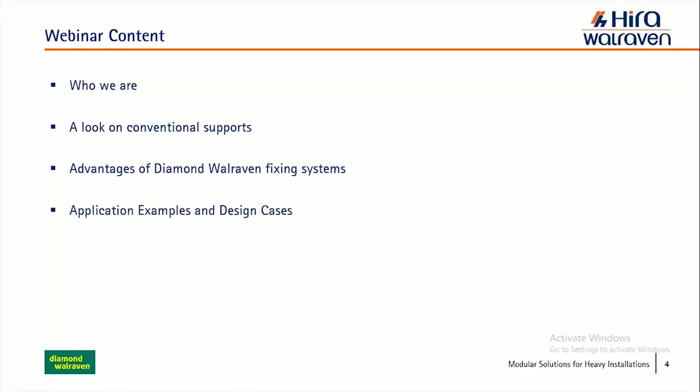So the content for today: I'll talk about who we are as the company, Hira Walraven. We'll have a look at conventional supports used to install MEP systems, the advantages of using our Diamond Walraven fixing systems, and some application examples and design cases of projects we've done before, and what kind of solutions we offer and what kind of problems we've solved.

To start with who we are, I'd like to first show you a quick video about our Hira Walraven Academy that we just launched earlier this year. This is a concept for us to share the knowledge we've created or learned over the past 40 years. We want to spread it out to the industry and help more people learn about this kind of system and installation. It includes webinars like this one, training and coaching sessions, and all kinds of engineering and support services. I'll just play it for you.

Right, so that was the video. I'll give a little bit more detail about us, about what we've done, and where we are located.

So we are a joint venture company between the UAE-based Hira Industries and the Walraven Group, based in the Netherlands. This joint venture was launched in 2015. Hira was founded in 1980 and currently has sales companies and manufacturing units in multiple locations across India, the Middle East, Africa, Asia, and the USA. Currently, we employ more than 1,100 people from more than 20 nationalities.

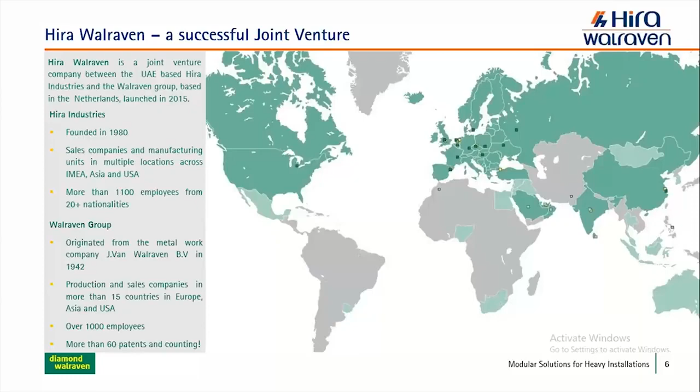Walraven itself originated from the metalwork company J. van Walraven B.V. in 1942, so it has several decades of experience. It currently has production and sales companies in more than 15 countries across Europe, Asia, and the USA, with more than 1,000 employees working for the group, and we hold more than 60 patents - something very exciting and innovative. This is something that guides us as a company.

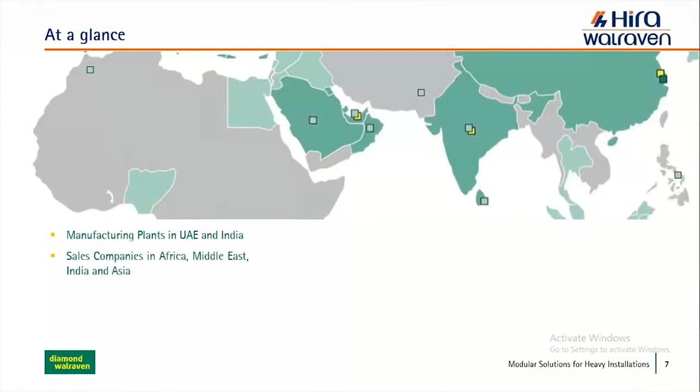At a glance, Hira Walraven has manufacturing plants in the UAE and India, and sales companies, as I said, across Africa, the Middle East, India, and Asia. We are a manufacturer and supplier of complete fixing system solutions, from pipe supports to vibration control. We are the only one in the Middle East that offers everything for this kind of industry.

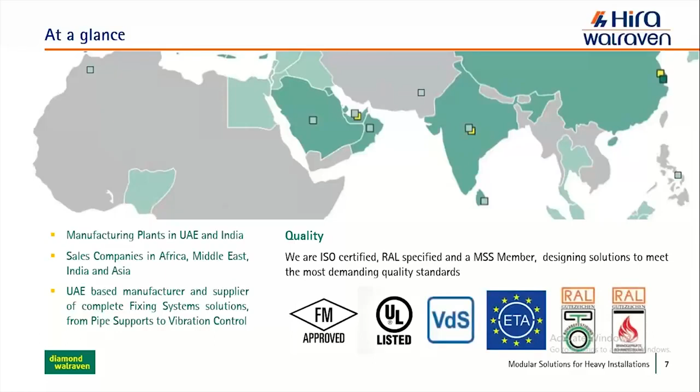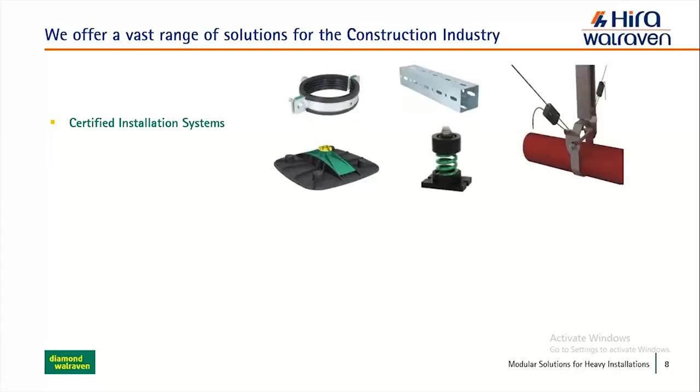Quality is very important for us, so we are ISO certified, RAL specified, and an MSS member. We design solutions to meet the most demanding quality standards such as FM, UL, VDS, ETA, and RAL for pipe supports. We offer a vast range of solutions for the construction industry that can be placed into different groups. One of them is certified installation systems comprised of pipe supports, channel systems, rooftop support, vibration isolators, seismic design, seismic restraints, sliding devices, and fixed points.

Then there are mechanical and chemical anchors with high performance testing, from concrete screws to through bolts, to high load anchors, to drop-in anchors, and chemical anchors, which are among the best performing types of products in the market.

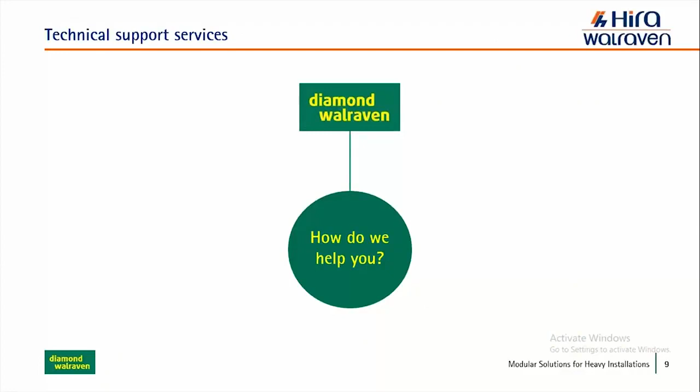We, as a company, how do we help you? We market our products under the name Diamond Walraven. This is our brand, company Hira Walraven, brand Diamond Walraven, and we offer anchor design services.

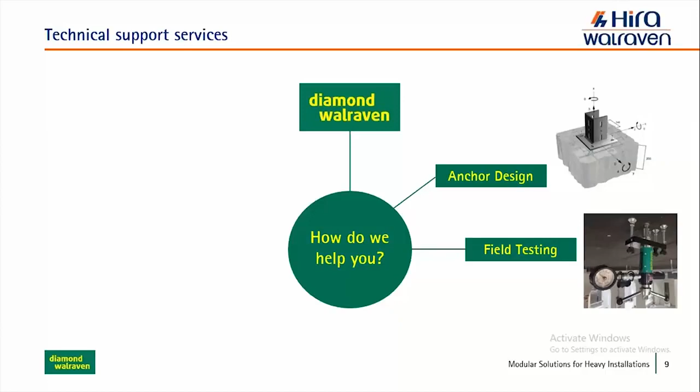We do field testing, pull-out testing on these anchors to verify the feasibility of the anchor itself and the base material, if necessary, to verify that the solution is valid. We do tailored and custom solutions for any kind of project, any kind of fixing system, and specifically seismic design for piping, ducting, heavy equipment, everything that needs to be supported from an MEP way, we do that.

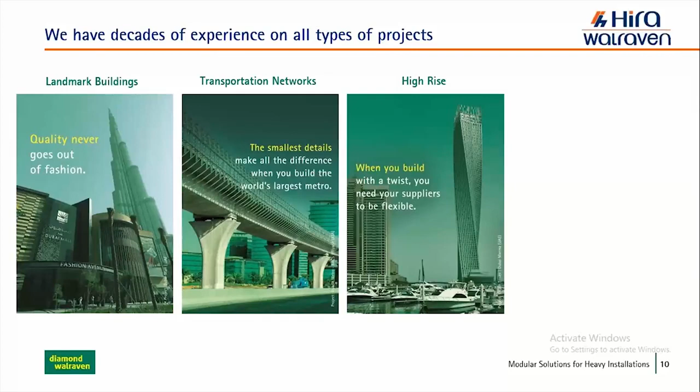We have decades of experience in all types of projects. For instance, projects like Dubai Mall, landmark buildings, transportation networks such as Dubai Metro or Riyadh Metro, or different kinds of transportation networks as well. High-rise buildings, so very high towers, we have worked on them, which we know have certain specifications. And iconic developments such as Expo, which we hope to see coming up to live next year.

So our values as a company guide us because we want to be the most preferred brand in this segment. We'll only get there by being the most innovative company in the industry. We want to set the standards, and we want to pioneer new and smart products and techniques.

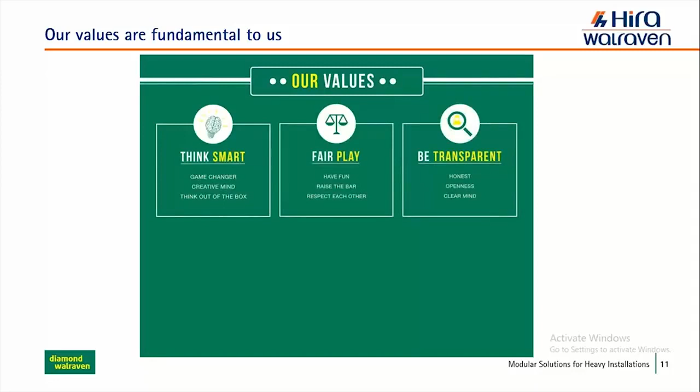A large part of this derives from our values, which we value a lot, and that includes thinking smart, fair play, being transparent, very open, very honest, communicating clearly, having open communication between ourselves and between our clients and our partners in the industry. We need to be reliable as well. We need to be trustworthy. And we always want to challenge ourselves and, by default, our clients and our partners as well. So this is what guides us as a company.

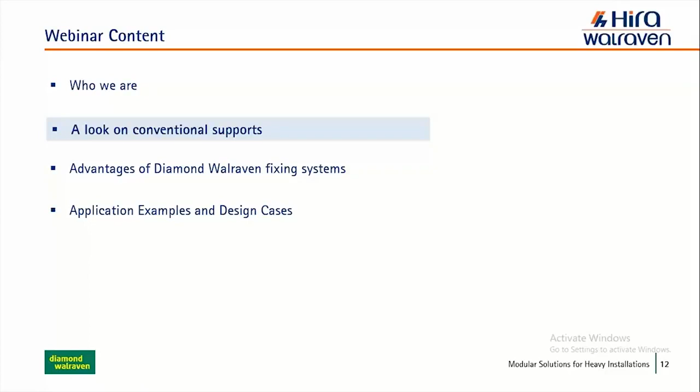Okay, so that was the introduction. Now I'll start talking a little bit more about what brought us here today. So I will start with a look at conventional supports.

Before I start, just allow me this introduction. The first MEP systems, let's say, were built to transport water from our ancient societies. People were very smart, very ingenious, and they always wanted to find ways to transport water wherever they lived. I'm talking about living in the desert or living in the mountains. There was something that always propelled people to find ways to inhabit any region, and one of the most important things was to have a good source of water.

So the Roman Empire, for instance, just built aqueducts of masonry. Here in this region, the UAE, we have very old irrigation systems used for agricultural processes and for that kind of use. And of course, we have evolved, and now our solutions involve pipelines, pumping stations that carry the water from spring to the cities.

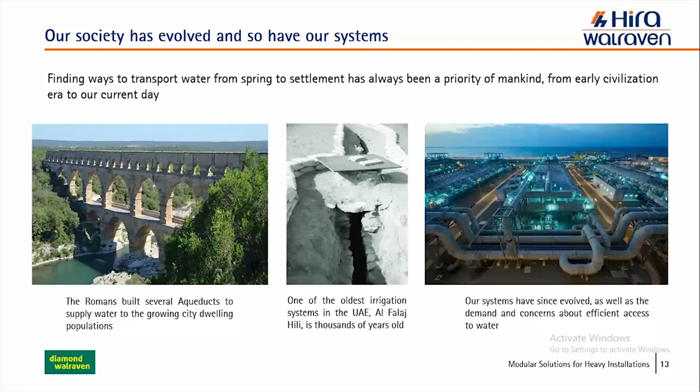So if our systems have evolved, that means that nowadays they require a network of supporting systems, and each discipline and project element has different demands. Of course, architecture and interior design want something that can be useful as well as pleasant aesthetically, like exposed installation. They need to be nice to look at, while they need to be functional. The integration of the various systems needs to be taken into account, and the effective use of available space is something of high concern as well.

For our segment, let's say civil, mechanical, electrical, what we need is systems that are very corrosion resistant, that are safe to carry the various components of electrical, plumbing, HVAC, or firefighting, and they need to be easy to integrate between all of these services.

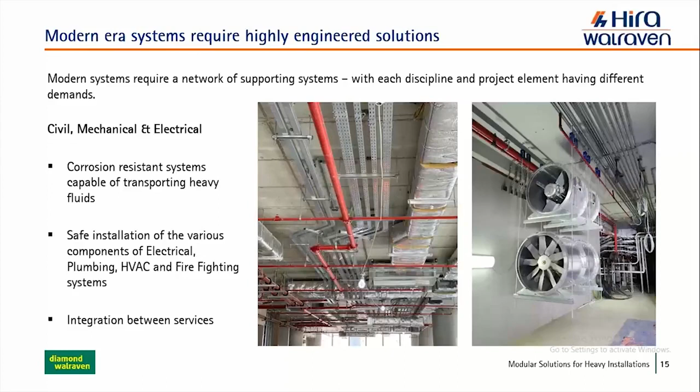And the reduction of non-structural cost greatly impacts the total amount. Why? Because the value of the non-structural elements far outweighs the structural cost. It's crucial to be efficient on all aspects of the construction.

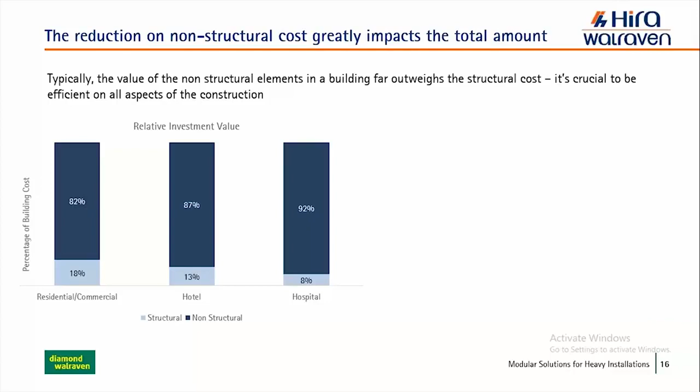I'll show you a couple of things. This one is the relative investment value of a building. The structural part for, let's say, residential commercial is 18 to 20%. So that means only a fifth of your money's worth is going to the structural part. Everything that's non-structural, I'm talking about MEP systems, furniture, architectural elements, facades, all of this is part of the non-structural part. So this is something so valuable that we need to be very efficient on installing and on designing these kinds of systems.

As you see, there are way more non-structural elements in a typical construction than structural. Structural, I would say, is beams, floors, roofs. This composes the skeleton of a building, but a building is only a building when it has furnishing, equipment, partitions, piping, windows, all of this.

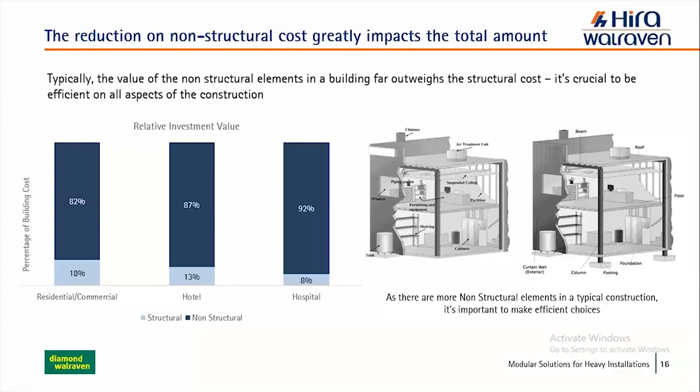If you are more efficient, if it costs less, if it's faster to do, that means you can move on to the next job. You can finish the current job much faster, hand it out to the client, and get a better return on your time and investment.

Typically, when you talk about MEP installations, you talk about heavy, or medium and light duty. What people have been using for the past decades are mostly I-beams, L-angles, C-channels. This is what I call a traditional supporting system.

Beams, of course, can be used to support piping. Is it a good solution? As you see in the images, to connect all these elements—pipe work and every kind of system—to these supporting structures, you need a lot of work. You need to weld, clean, lift them, which is not easy. It costs a lot of resources. As a general rule, these kinds of systems usually take 4 times longer to install than what we propose as a better solution.

And generally, they take more resources. And it is clear why.

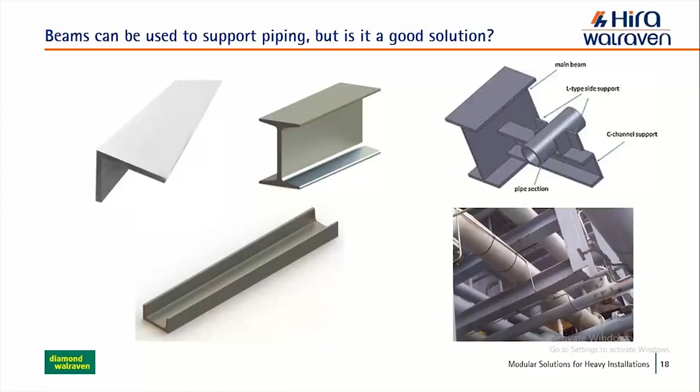Conventional systems are much more labor intensive because you need to cut beams at site, with heavy tools or torches. Then you need to remove the slag, grind, and perform a lot more finishing work and steps. If you want to weld, which is often the case to connect different elements, there needs to be surface preparation, and it takes time, done a little bit outside of where you actually want to install.

Welding takes time and requires special licenses, and you need to be concerned about safety. You need to grind after welding, and repaint or galvanize. And of course, this is heavy and requires more resources to fix in place. You need more people to carry or lift them into place, or heavy machinery to support you on this task.

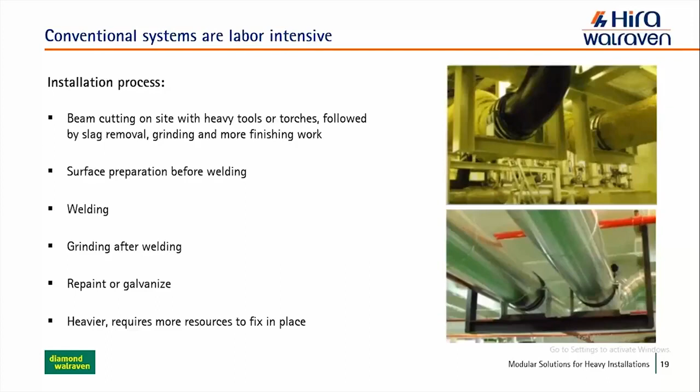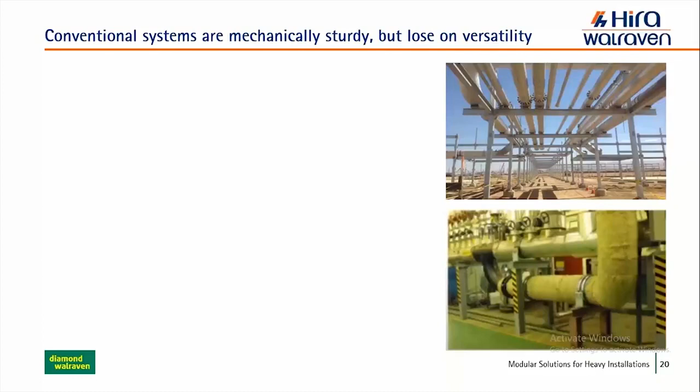So it's not easy to do all of this, yet you still see a lot of projects where this solution is still proposed. We believe at Walraven this is not the best or ideal way to do this. Now, of course, these systems do have advantages, the main one being that they are very sturdy—mechanically amazing, able to carry heavy loads—but it costs a lot, and there are a lot of drawbacks to consider.

You lose a lot of time on the job. You need specific health, safety, environment, and technical certifications just to perform the welding. Plus, of course, you need to undergo inspections on the quality of the welding, which also takes time. There's a greater fire hazard, since we're talking about hot work.

And you have a lack of flexibility for future expansions or modifications. So if you want to change the type of pipe, the piping direction, or even the diameter of the pipe, it will take a lot more of these steps to be performed again, or even doing it all again. Then there's high cost in man hours because of all of this—more energy, more material, more people working. And this is not an efficient way.

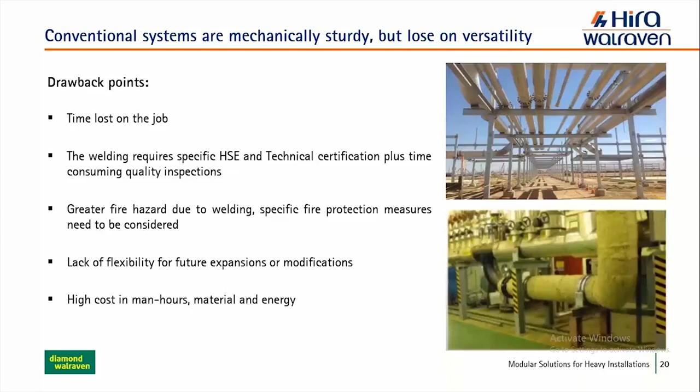This is what increases the cost of mechanical systems in a building. So to maximize your return on investment and cut project costs, the best solution is modular support systems.

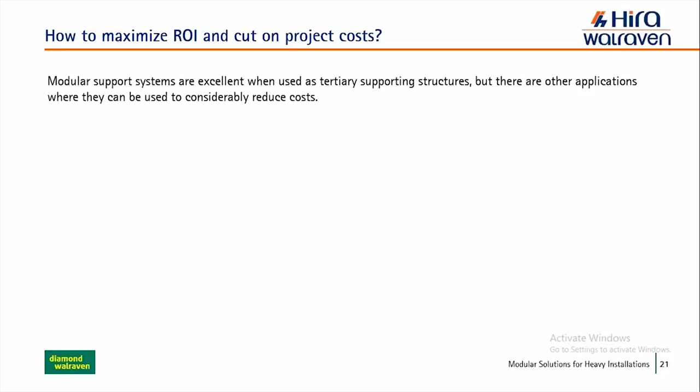They are very common as tertiary supporting structures, but this webinar is more geared to consider them as secondary steel structures, serving as a support connected to the main structure of the building, whether concrete or steel. Instead of using another typical beam or element, you can consider heavy modular solutions as secondary structures for your project.

Another advantage over traditional systems is prefabricated assembly. If you want to speed up your process on the factory floor instead of at site, we can design and fabricate these for your project based on your demands and requirements, and per your need for specific systems like duct sizes, pipe sizes, equipment, and fans. We can manufacture them and then ship them out to you, saving you a lot of time.

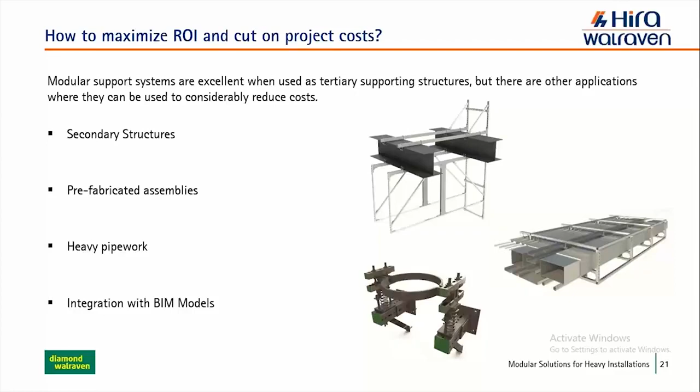For heavy pipe work and integration with BIM models, it's much easier to use our extensive BIM library, which has all the models for these products. This makes it much easier to integrate with your project BIM model, and can speed up your installation time approximately 4 times compared to traditional systems.

So our solution for all of these heavy applications is the Maxx heavy frame modular system.

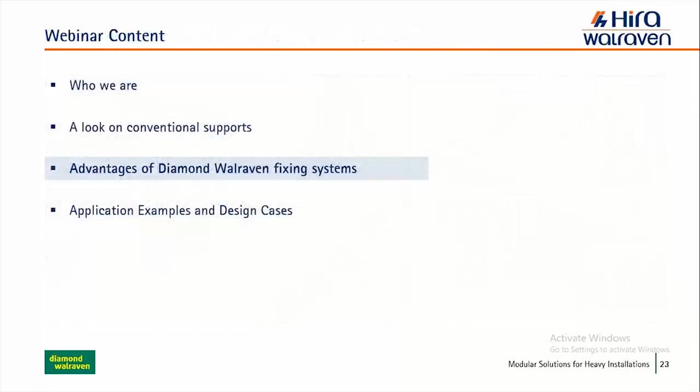Before I go to that, I'd like to speak a little more about our other solutions. We offer channels for light duty applications, light to medium duty applications, channels for medium to heavy duty applications, and our Maxx heavy rail for heavy duty and industrial applications.

Our rapid rail, which is our light duty segment, we offer in 27x18x1.2 size, and this is by standard in pre-galvanized or electro-galvanized finish, which can also be done in HDG in our Ultra Protect. In the previous webinar, if you attended, I spoke a little about our BUP system, and stainless steel if necessary.

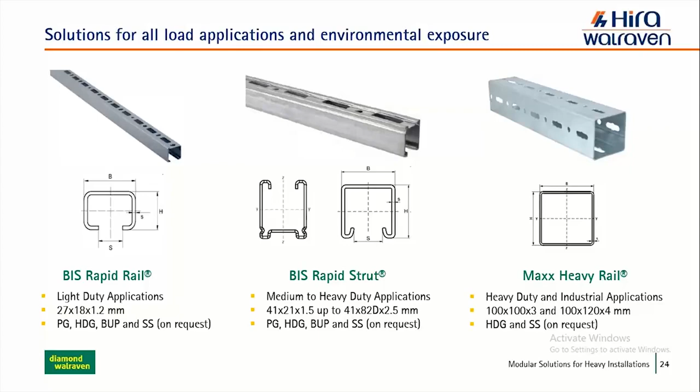Same goes for our rapid strut: electro-galvanized, hot dip galvanized, our Ultra Protect system, and stainless steel. Our Maxx is by default HDG, but if necessary we can go a little further up for the project.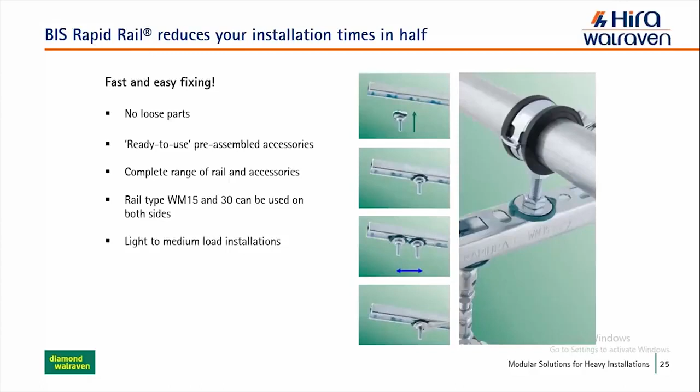Our rapid rail reduces installation time in half by using no loose parts. Everything is pre-assembled, including the accessories, and you just need to connect them to the channel itself, to a clamp, then to the pipe or whatever needs to be installed. There's a complete range of rails and accessories, and our rail types can be used on both sides, suitable for light to medium duty installations.

Typical installations would be sanitary, some light duty ducting, and light duty piping, which can be connected as single piping or multiple piping running side by side. It's very flexible and very common. Instead of just using a normal C channel or angle bar, consider this to speed up your time.

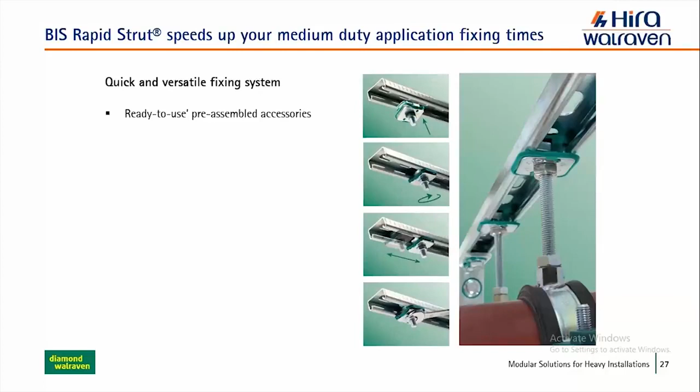For medium to heavy duty installations, we offer the rapid strut, a serrated channel with ready-to-use pre-assembled accessories suitable for all profiles. Our rail and cantilever arms have a serrated profile for extra grip. We offer them in sizes 41-21-1.5 all the way up to 41-82 double, from 1.5mm to 2.5mm thickness, depending on the type of requirement and load. We study it with you and help you choose the right solution.

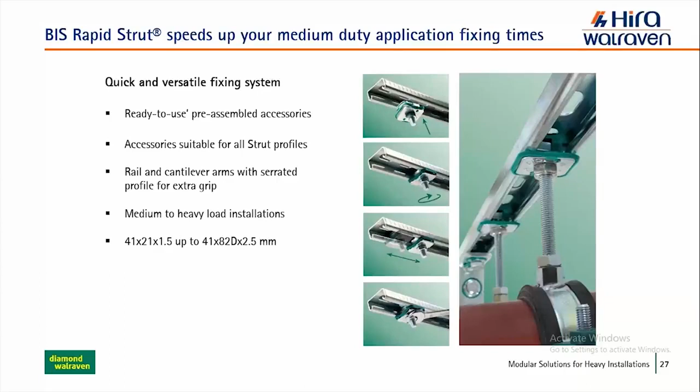But for heavy applications, there's something else. The rapid strut can be used to connect all types of pipes, ducts, and equipment, whether multiple pipes side by side or a single pipe, as shown in these images. It speeds up your time considerably. There's a huge impact on installation times compared to doing a single drop-in anchor with threaded rod and then pipe, which takes a lot of time. This can save you quite a lot of resources on your construction project.

So now moving on a little bit to the Maxx heavy rail profile. We offer them in 100 by 100 by 3 and 100 by 120 by 4, so you're talking about a square profile or a rectangular profile. This is what we offer for heavy applications.

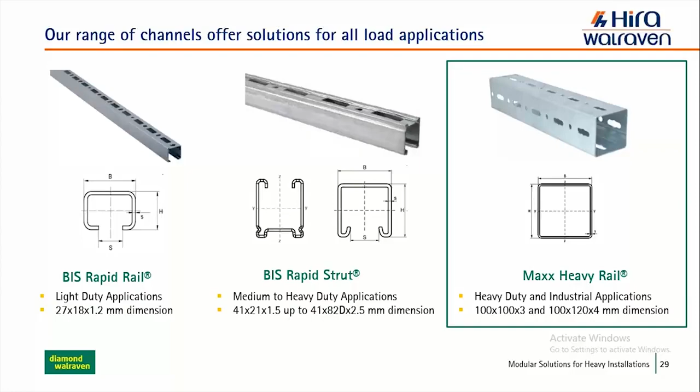I'm talking about heavy pipes, 20-inch for instance. Think something like this: heavy equipments, heavy chillers, something that needs to be installed and it's not easy to install, or it will require a lot of support. This is a solution that you can consider, or when it's something that by default needs to be installed and exposed under rough environment conditions. Since this comes by default with HDG finish, this is what we typically propose for this kind of applications.

So the Maxx heavy duty profile features a closed box profile that's highly resistant to torsion, has continuous perforation on all sides. The standard finish is HDG, with stainless steel available. There's a huge variety of connectors and accessories for easy frame building. And of course, as before, we have an extensive library of 3D models to be quickly integrated with the BIM model of the project.

So the section itself is quite light. You see, for instance, the 100 by 100, it just weighs about 8 kilos per unit weight. So this is lighter than a typical I-beam of the same kind of dimension. So it's much easier to install, plus has all of the advantages of not being needed to be welded to any other element. You just quickly connect everything in a modular way.

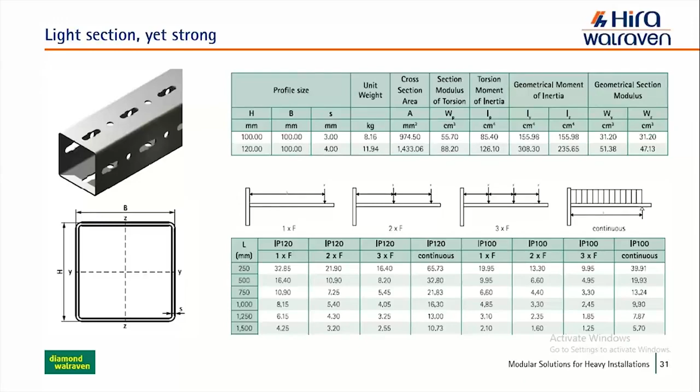Plus, being such a light section, it's still quite strong. You can see that it can carry all the way to 32 kN, for instance, as a cantilever form. So it's something that's very sturdy as well. So you don't have to worry about if it's going to hold the load that you need, or if it's going to support your equipment. We designed that in a way that it will be able to support, because we have a lot of confidence, and our results and our data and our tests show that this is something to be trusted.

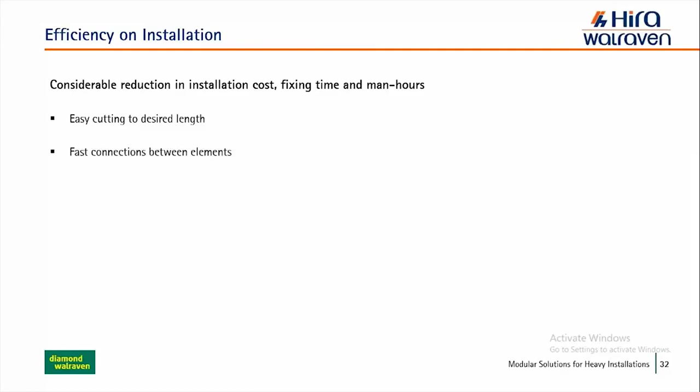So Maxx itself offers a considerable reduction in installation cost, in fixing times, and in man hours. It's easy to cut to the desired length. It is easy to connect between elements. It is very flexible for future expansions or modification of the system. If it needs to be, you can reuse it easily, because you just need to remove what was connected and then reconnect again.

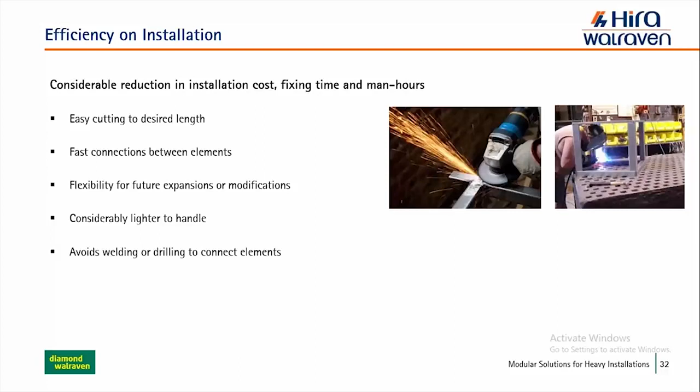It's considerably lighter to handle, and more importantly, it avoids any welding or drilling to connect elements. So the type of work at the factory floor or even at site is completely cut off. And there's no need for repainting or galvanization since the surface is already treated. So there's no need for galvanization, repainting, any grinding, deburring, or slag removal. So it will save a lot of time in these kind of installations.

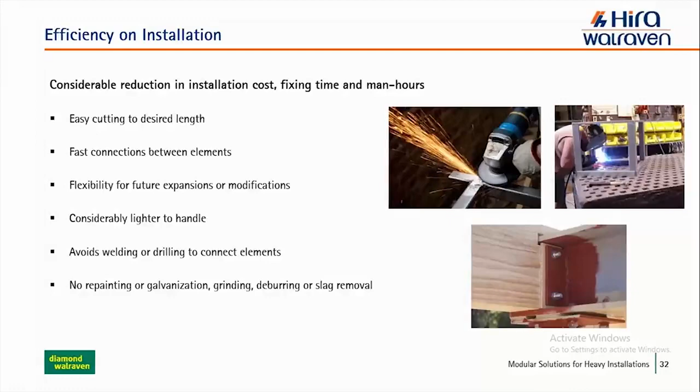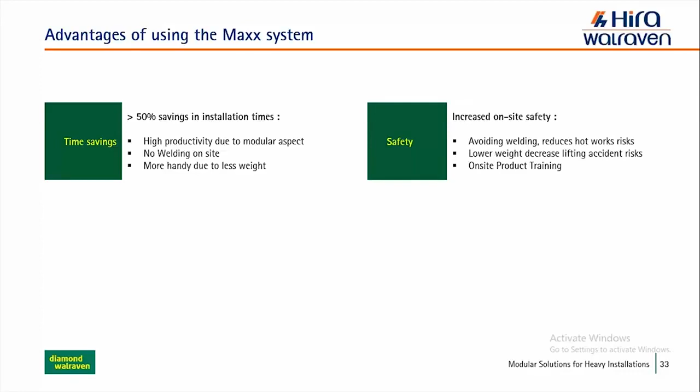So to sum up the advantages of using the Maxx system: it offers 50% savings in installation times, if not more, with high productivity on the site, no welding, and of course it's more handy. It's a lot more safe because since it's lighter, it's easier to carry. You avoid welding, so you reduce hot work risk.

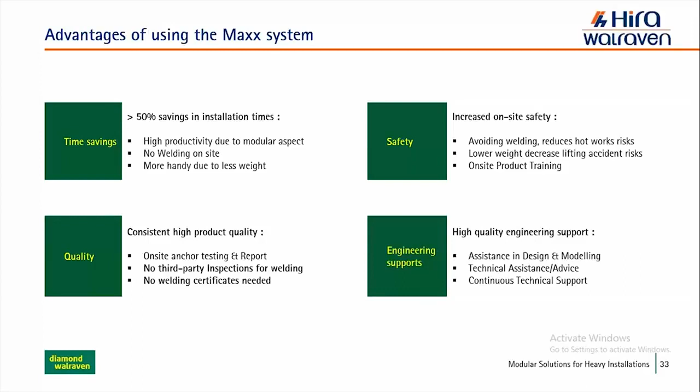And we can offer complete on-site product training and coaching as well. The quality is very consistent. There is no need for third-party inspections for welding. There are no welding certificates, and you will be completely safe using such a system. And of course, we provide high-quality engineering support. We assist in designing and modeling, we assist with any technical advice, and throughout the project we offer continuous technical support.

So before, I was talking a little bit about why this is something specifically used for outdoor installations, and this is because it features high corrosion resistant performance. Because by standard, since it comes with hot dip galvanization, it will last when exposed to rough outside conditions. It can last for a great number of years without any concern over life expectancy, or if it's going to rust, or if it's going to fail after some time when exposed to rain or in an industrial setting. This is something that's very resistant to that kind of conditions.

So hot dip galvanization is a process where we apply zinc to the steel by immersing it in a zinc bath.

By doing so, a thick zinc layer is applied to the entire product. You won't see less zinc in one part and more in another—this is very continuous and very uniform. The Maxx itself has a coating thickness of at least 75 microns.

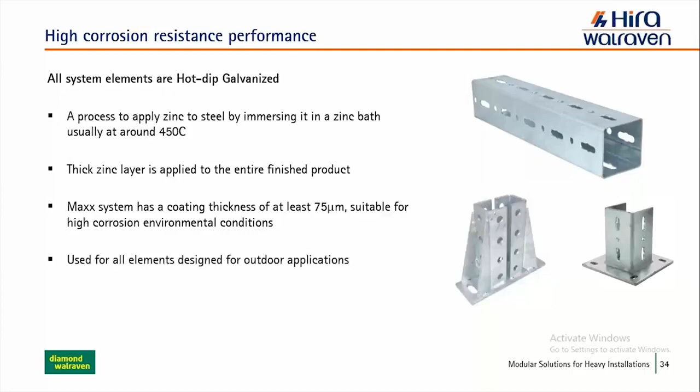So it's suitable for high corrosion environmental conditions, and when exposed to rough weather it will resist for a long period of time. This is used for all elements designed for outdoor applications. Typically, hot dip galvanized can be used in C3 to C4 corrosivity category levels—medium to high corrosion levels.

An idea of the typical environments this is used for: indoor spaces with high frequency of condensation and high pollution from production processes. Think about chemical industries—even outside, they are quite aggressive to support systems. By hot dipping, or by using our Maxx system, we can control the damage that corrosion causes.

In outdoor environments, you'd see urban and industrial atmospheres, or temperate zones with high pollution, and coastal areas without saltwater spray or full immersion, but with some exposure. This is where HDG can be used, and where we typically use this kind of system. Whenever something else is needed, we study it and offer alternatives, such as stainless steel.

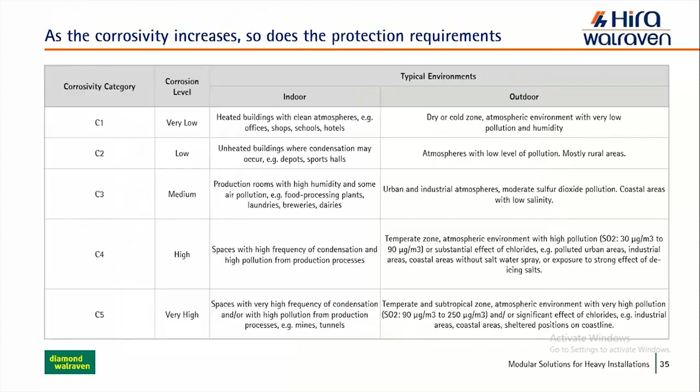Depending on the condition, if it progresses to something heavier or you expect something different, it needs to be studied and verified. But as a rule of thumb, this is something to consider. By using this kind of product, you'll be safe in any outdoor installation.

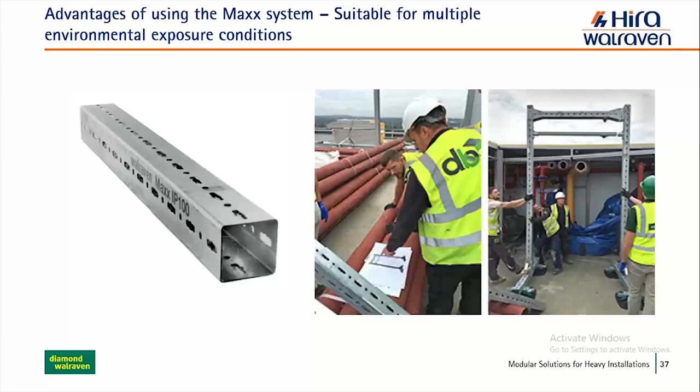In this kind of case, this is what we go with—we go with Maxx. We believe this is the best solution, and then we can couple it with the rest of the systems if necessary, and in this case it was necessary. So this is the kind of solution we can offer in your project. Of course, it's not only that.

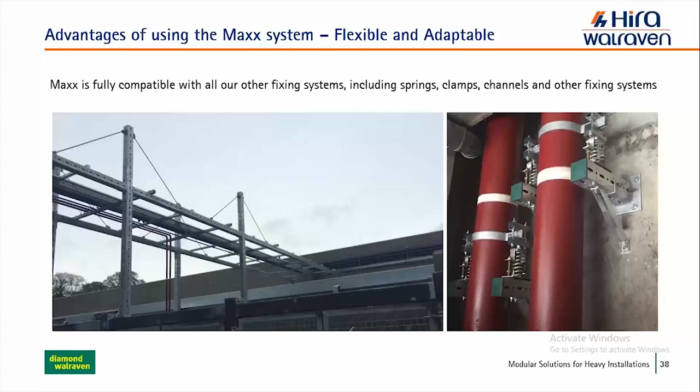Another example of heavy load supporting is chill water pipe risers for high-rise towers. At the fixed points and sliding points, this causes a lot of stress and huge reactions, and because of that, the traditional way to install this is not the best, since you cannot really control movement and the actual stresses on the structure. So we go with what we believe is the best solution, which is again using our Maxx system.

To connect elements in our Maxx system, we have what we call the Maxx hammer fix, which enables you to connect every element in just 3 steps. You just need to insert this special bolt between the main Maxx support and all the other elements going to be attached to it. You insert, turn a quarter of a stroke, and then attach with another nut. It's so easy. So if you're considering how to install something in the middle of a channel that you cannot reach inside, this is the solution.

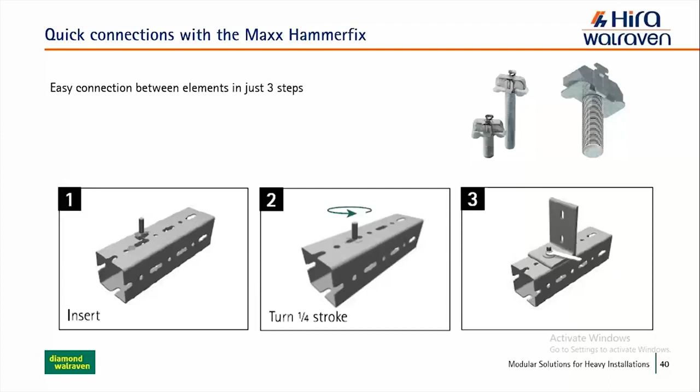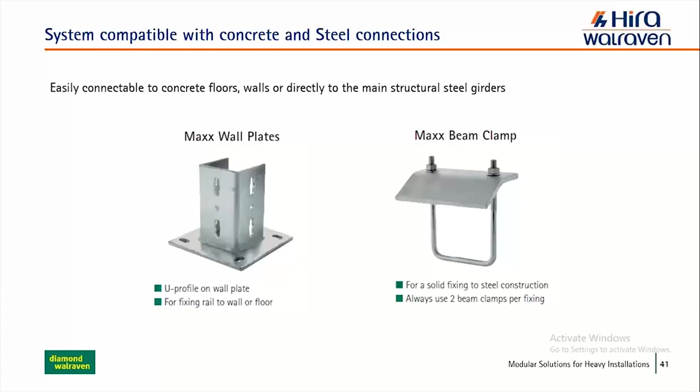Of course, the system is compatible with any concrete and steel connections. In concrete, we connect the system to wall plates. You connect the profile directly to the wall plate, and then use heavy load anchors, through bolt anchors, chemical anchors, any anchor needed depending on the actual application. Or if you're going to install on steel girders or steel beams, we offer beam clamps that can easily be used to attach the Maxx profile to the existing steel structure.

If you compare this with preparing in a traditional way with I-beams, it will take maybe 1 hour with all the welding necessary and all the carrying. It will take a lot of time. With this, you can do it in 10-20 minutes. It's so fast and so much easier that instead of building 1, you build 4. That's basically what we're talking about.

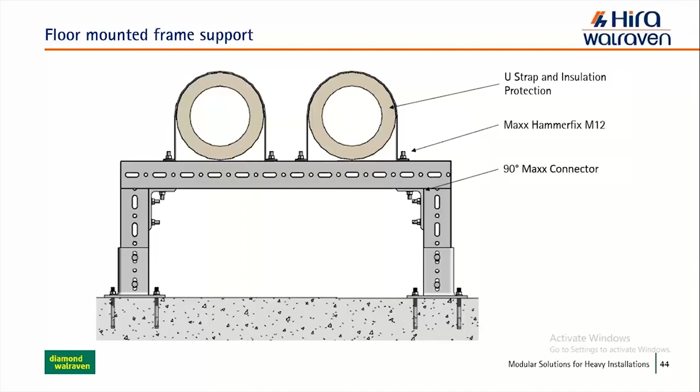For floor mounted, it's pretty much the same thing, just inverted instead of ceiling, but the elements are the same kind of thing. This is also very typical for heavy piping in machine rooms and plant rooms, using the Hammerfix, the connectors, and the wall plates.

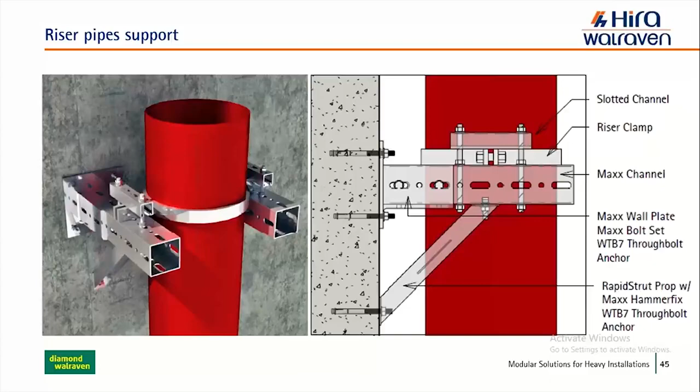For this kind of application, the safest way to go is always with something very sturdy, mechanically strong, such as our heavy-duty system. In this case, you would use our Maxx, then our wall plate, connected to the concrete wall with through bolts, so with our ETA-approved anchors or any chemical anchor suitable for the application, depending on the actual reaction values. By designing this, we guarantee a long-lasting service life and a safe connection to the riser pipe.

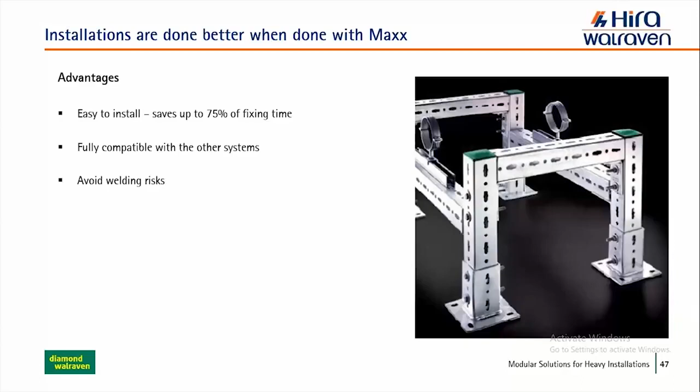To sum it up, installations are done better with Maxx because it's very easy to install and saves a lot of fixing time. It's fully compatible with other systems and avoids welding risks. This is typically used for high elevation installations, or when there's a considerable span between supports, for industrial and highly corrosive environments, and for heavy load equipment and pipes. These are the three main factors: when we need to bridge a large span, when the environment is very corrosive, and when there's heavy load equipment to be supported.

So how do we do it? We propose the solution and verify it using finite element method software. We don't just do it by hand, so we do it in a proper way. We study and check the system feasibility, test the section stresses, check the moments, the reactions, and the displacements. We also verify the connection between frame elements, which is very important—this is often the weakest link. A proper verification of the connection between elements is where one needs to be completely sure, especially for very large spans, or when connecting channels between one another to bridge a large span.

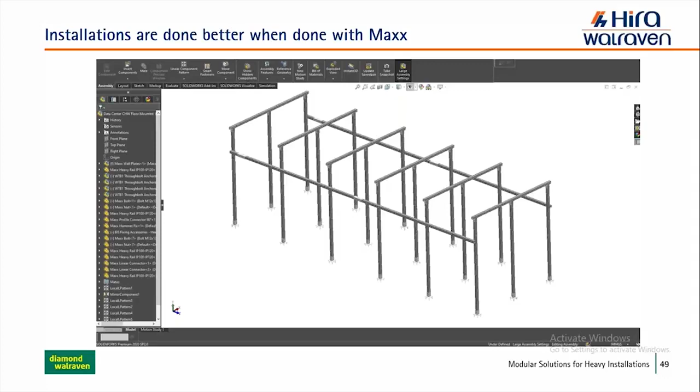This is our process for these kinds of designs. After we study and reach a safe solution, we model everything in 3D, then convert it to something that can be integrated with the BIM model. We give you all of this, including the assembly parts, exact material quantity, lengths, and all associated documentation, which will make your installation quicker. Even on the installation side, we'll coach the teams doing the install, inspect that everything is done properly, and try to help you throughout.

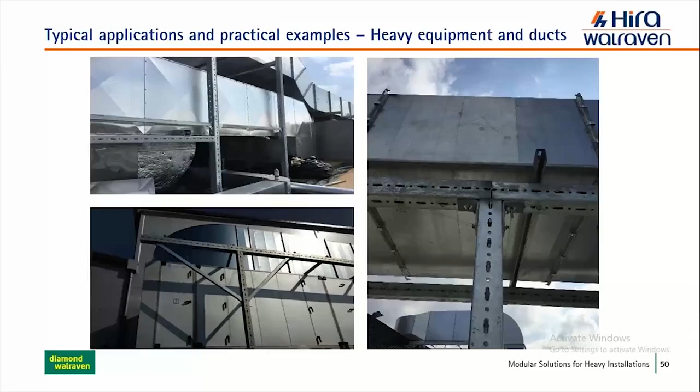Some application examples of what we've done in the past and present: heavy equipment and ducts on outdoor installations in industrial settings, supporting large spans and huge lengths of ducts. This is where we would consider using our Maxx system, as shown here in the pictures.

Another example is supporting heavy industrial equipment. In this picture, the concern was that this machine needed to be elevated about 6 meters high, with a lot of clearance underneath for the operator to reach equipment placed beneath it. With a traditional system, this would take a lot of space, take a lot of time to manufacture, and everything would need to be galvanized since it's installed inside an industrial plant. All these considerations led to using Maxx, which was very easy to design and install, while guaranteeing a high service life.

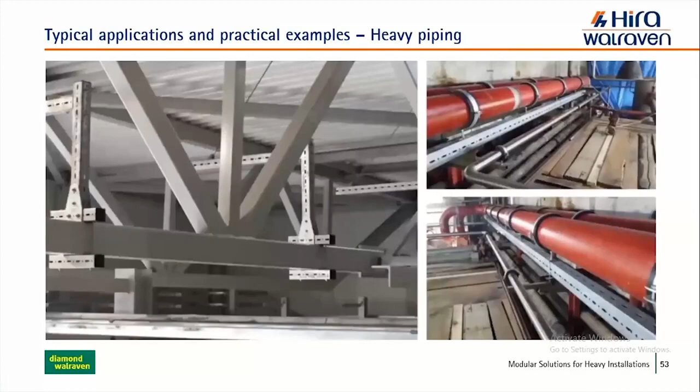To support heavy piping, straight from either concrete walls or steel structures, this is typically where you'd see the need for using a heavy modular system to support these kinds of loads.

Fixed points, as I mentioned before, are on the risers, but fixed points can also be on horizontal pipes. In this situation, this was a fixed point for a number of parallel pipes, and they are installed outside, so they're constantly exposed to rain and snow. They're exposed to heating and freezing cycles as well.

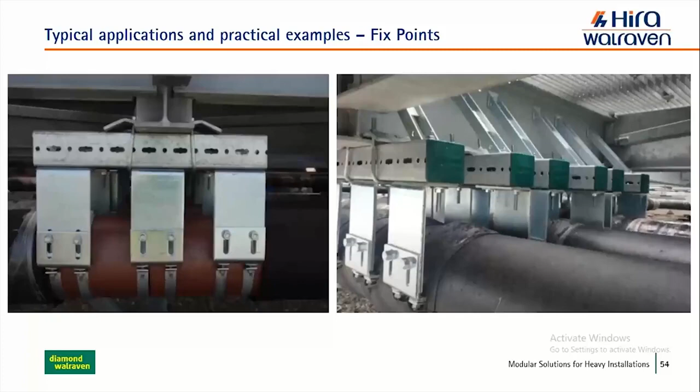So usually it taxes the system a lot on the corrosion level. In this situation, we use a mix of our Maxx and BIS systems, our fixed consoles, to support this. This is an example of how the system can be connected between all of the elements and all the different systems that we propose. All of that can be connected and used to give a solution.

This is another example, system compatibility, also inside an industrial plant. As you can see, especially in the right picture, the pipes have a tendency of expanding and contracting, so we needed to allow the pipe to move.

The best way we found to install this was to use the Walraven Maxx as a main frame of support, then use some cantilever arms, and then sliding devices on top of that. This is an example of how the system can be compatible between each other, how it can connect, and the kind of solution you can expect when working with us.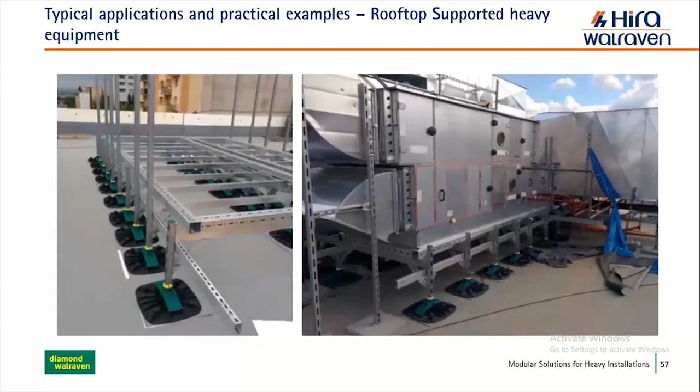Again, considering the corrosion problems and the dangers it causes, this is where we want to use the best solution we have. In this situation, we would use our Maxx as a main frame, and our BIS system as a supporting structure to support the chiller itself, the machine, or the equipment. So these are the types of solutions we're able to do with our system, which can be easily integrated between one another.

Another example of that, another example of the frames. And now I want to show you an actual case we've done quite recently here in the UAE.

This is a multi-purpose arena that is now being finished, if not yet completely finished. Some of the considerations we had to take into account: it's built near the ocean, so there's a considerable need for corrosion prevention. All systems—MEP, fire and life safety, interiors—any system needed to be supported from the main steel structure. And the MEP installation followed a very fast schedule, so quick fixing times were crucial.

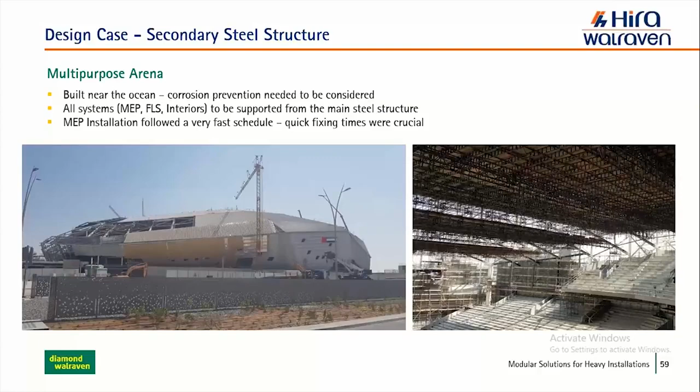So the idea at the beginning was to use a traditional system, since the structure is already composed of I-beams and H-beams. The first idea was to extend that structure into a secondary structure built of the same elements in a different size, then go through the process of fixing those connections and fixing everything. The concern was it would take too much time to install, plus with all the extra work, they would need a bigger labor force. There needed to be a different solution, and that's where we came in.

So the structural geometry had some considerable challenges. It was a steel structure with different relative elevations between girders and inclined roof beams. The span between main beams was considerably large, in some points reaching up to 9 meters.

There was a limitation on accessibility to the upper beams for installation works, because the work deck was restricted to a certain load. So even machinery could not go all the way up to support. There was no easy way to do with the system that was originally designed or proposed, so we studied in depth to come up with a better solution for this kind of structure.

For fire and life safety equipment and piping, the NFPA 13 specifies massive design loads on the firefighting supports. And of course, there's highly regulated structural safety parameters that we tend to follow, with the deflections that are admissible, with the stress as well. So this solution needed something of an industrial kind of characteristic.

NFPA, just to give you a highlight if you don't recall exactly, demands that the supports be designed considering the pipe filled with water, then this weight multiplied by 5, plus 250 pounds, or approximately 114 kilos, on each support. So if we're talking about a 9-meter span between supports, you have multiple supports in between, because you cannot just use a pipe support across 9 meters - you need to support them every 1.5, 2, or 3 meters depending on the pipe. Each support needed to have this into consideration, which means that the design loads were massive.

The zones with 9 meters between supports required rigidity coupled with lightness to comply with code. There was no easy way to install because the girders and the beams were at different heights, so if we wanted to keep this at the horizontal level, we needed to be creative as well. In this situation, we used different levels of Maxx and different connections between each other to come up with a structure that could support the ducting, the firefighting pipes, and the chilled water pipes.

Because of the way everything was installed, we needed to consider multiple services being supported from the same kind of structure. This is where we became very creative, but this is the kind of solution that we can offer in your projects as well.

Because we're using our Maxx systems, we were able to fully and quickly integrate with the existing BIM models of the project. You can see on the right side what we've done after we got the model from the structural engineers and the MEP engineers on this project. We then modeled everything and inserted it all so we could check the clashes and predict if there were going to be any issues when installing.

And preparing everything - this is the kind of solution we offer. We try to go with a full one-stop solution, from design to actual installation and coaching. We kept continuous assistance during the project, and during the installation we kept inspecting, kept training the teams, and kept seeing exactly what they were doing wrong and right, so we could help and guide them as well. So we don't just do the work and hand it up to you, leaving it up to you from there - we give this kind of support, and we feel it's very important to give.

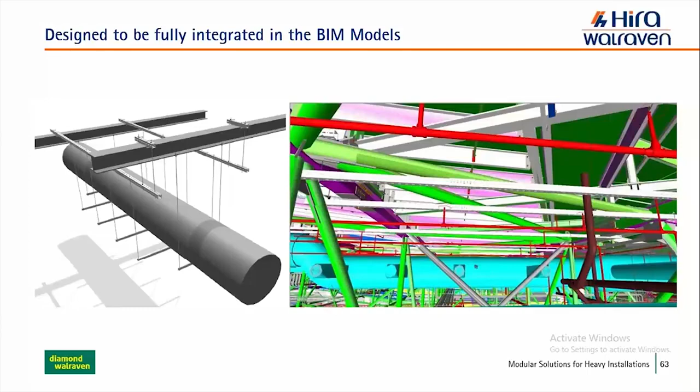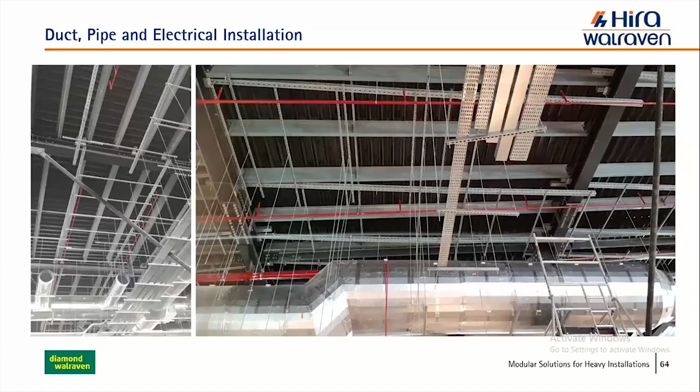So the final product would look something like this. You can see several cable trays installed, several ducts, and several pipes, specifically firefighting pipes. You can see our Maxx channels used as secondary steel support, connected directly to the main steel structure of the building, with everything directly attached from it. As an example, the firefighting supports and ducts, and every MEP system, were designed and supported from our Maxx system.

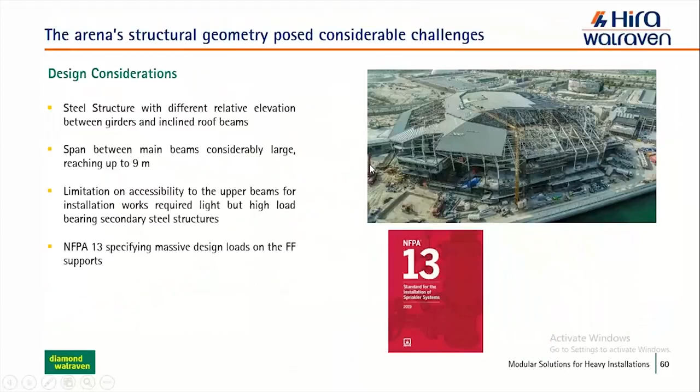Another question from Muhammad Hamid: Is this system certified by third party, which guarantees the safety concern?

That's a very good question. Yes, these systems are tested extensively by third parties, both locally and internationally. Moreover, at Walraven we are a member and a founder of the RAL system, which is verified by the German Institute of Quality. So all the systems I talked about today are verified both here and in Europe, specifically Germany. Not only the actual design process of how we design this and what is the admissible load, admissible stress, and admissible deflection, but the system itself and the material itself is tested and verified. Thanks for the question.

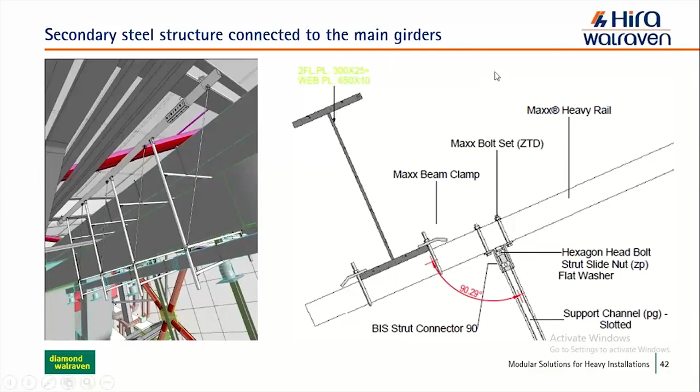Thanks for the question, Mr. Anujit. By sagging, I believe you are talking about the deflection. Correct me if I'm wrong, but if this is the case, let me just go back to the project I've shown. This is a fairly good question, thank you.

So here, we were connecting the main Maxx channel to a secondary Maxx channel that was working as a support. In this situation, irrespective of the length, we designed this up to an admissible stress and deflection as well. So this sagging and deflection were taken care of prior to the actual installation. We designed it considering what kind of stress and deflection we could allow, and only once we verified that, regardless of the geometry after installation, the deflection passed, did we say the design was okay.

So some of the cases we were trying to design were not admissible, so we had to increase the number of supports to support a certain load, pipe, duct, or whatever was necessary to be supported. Only once it passed all those criteria did we deem it safe.

We have a question from Mohammed Hamid: Can you share the presentation for further reference?